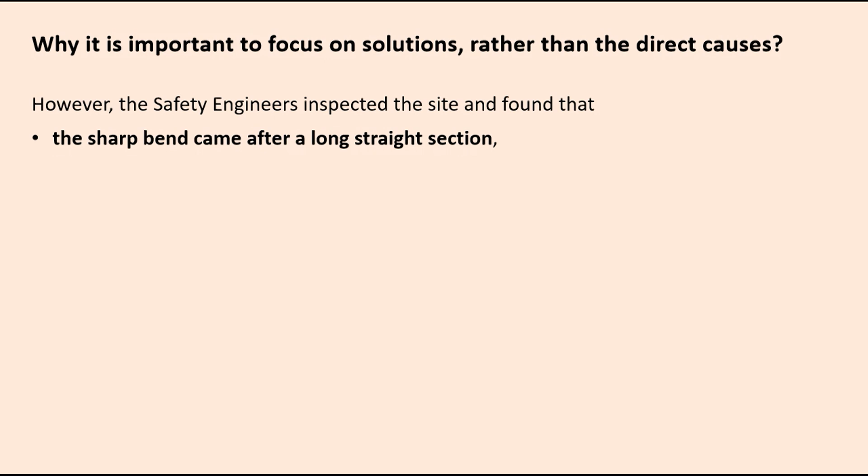Before that you need to introduce some mild curve, so that the speed goes down, and then you can have a sharp curve, or you should have enough warning of that situation. The sharp bend warning sign was not placed, or maybe not replaced once it got damaged. So the first root cause might be this, which encourages the driver to have higher speed when he approaches a particular sharp curve.

At the same time, you had not given the proper warning, and our infrastructure should be such that if the driver makes a mistake, he should be able to adapt to that, or be protected. The roadside safety barrier was missing, which might have prevented this vehicle going down into the valley. If the sign had been in place, the driver might have reduced the speed, or if the barrier had been there properly, the extent of the accident may not have been there.

Now, these are two different analyses of the same event. Whenever such an accident happens, we should start looking into the root cause which might be creating a particular scenario perceived by the driver, and then the driver's actions. If you see only the driver's action and do not go to the cause behind it, you will not get the correct reason.

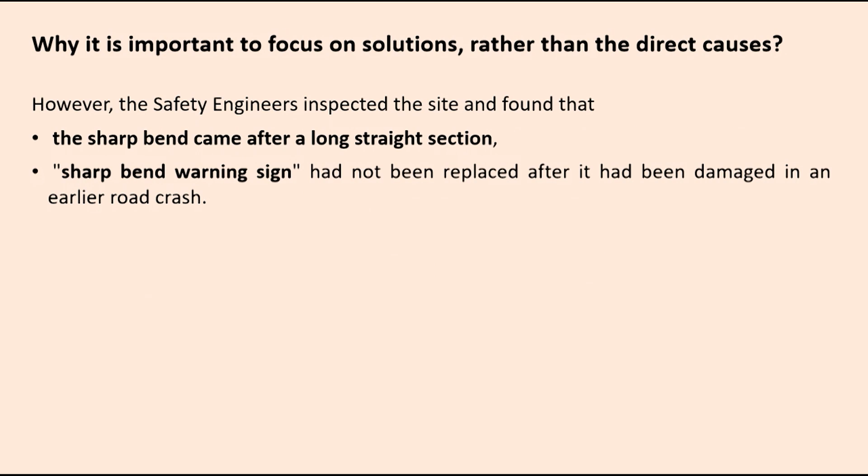So, even with the previous conclusion, if you do driver training and those things at that location, it may not be effective unless you figure out and address all those causes. This is a simple example just to show, for any incident or crash you see, how you are going to investigate it. Okay.

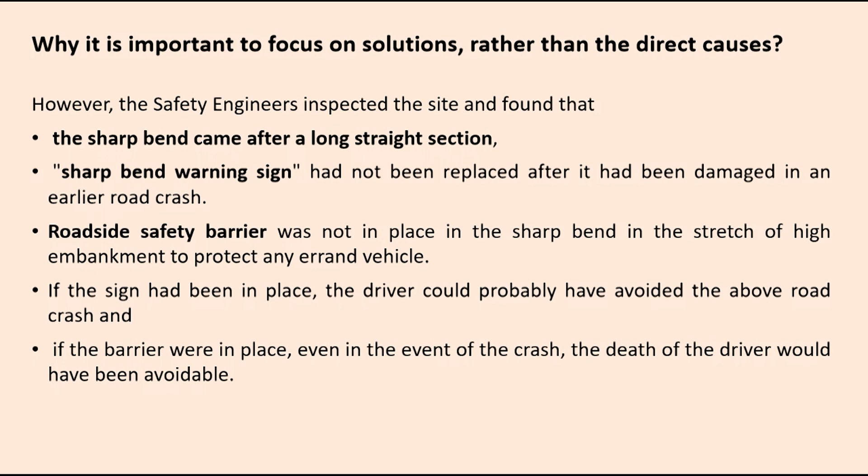Okay. So, then black spot. We keep hearing the term black spot, or sometimes it is called hot spot. Gray spot is slightly different. It refers to a specific location or stretch where a high number of accidents or crashes are expected to happen, which might be fatal or serious injury crashes. Property damage and those things may not come under a hot spot or black spot location.

So, identification of black spot locations is important, so that we can do preventive measures in order to reduce the number of accidents. So why do we need to identify black spots? One is that if you target road safety improvement, you need to know where to do it and where it will be most effective. Black spots are those locations.

Another is efficient use of resources, because you may not have ample funds. With limited funds, you cannot treat all accident locations. So you need some priority: stage 1, you are going to spend maybe only 100 crore. Where to spend 100 crore? 100 crore may not be enough to treat all the accident locations. So you need some priority for efficient use of resources, so that whatever money you invest, you get the maximum accident reduction.

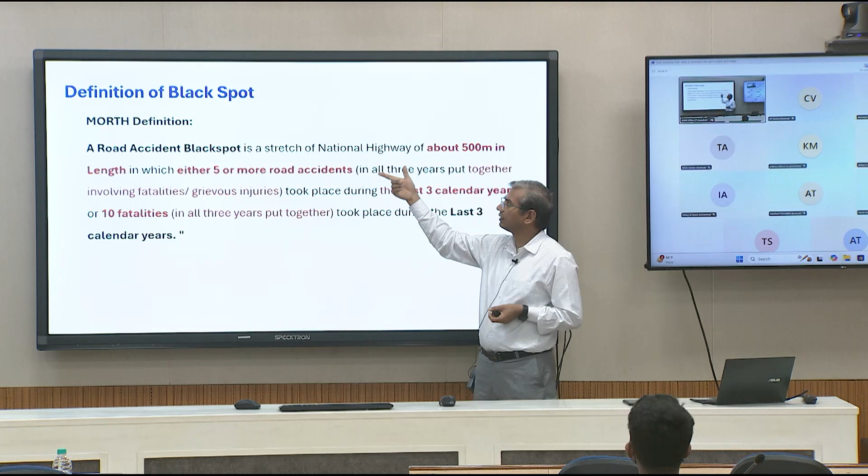Okay. So, now here this number is fixed, the length is important. So, a 500 meter stretch you need to choose. How to choose that 500 meter stretch, that is important. Suppose you are given this kind of scenario where this is a 1 kilometer stretch length, and the engineer started, okay, this is 0. So, he divided 500, then 500. Now, does it qualify as a black spot or not? Yes or no?

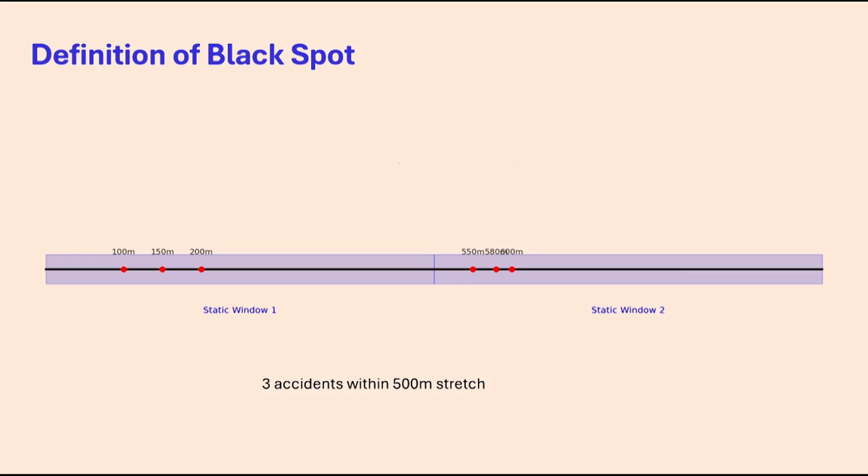Sir, it depends on road condition actually. A black spot happens anywhere, but it depends if potholes are there, if any wrong intersection or junction is there; it's not a particular scale. A black spot can happen anywhere.

Sorry, maybe I did not explain it properly. All these red dots are serious injury accidents, or might be fatal accidents, single fatal accidents. So, you have these 6 dots, and these are the locations of those accidents in meters. So, with that information, whatever the engineer had divided into 500 meters, is that a correct approach?

Yes, sir, that is correct. So, anybody else has 300 or 500? Yeah. So, 500 let us assume, because MORTH has specified 500. It can be plus minus 10 meters or 50 meters, but mostly it is 500. So, any other comment? Now, if we go to the definition, it says 500 meter length. It never said where to start from.

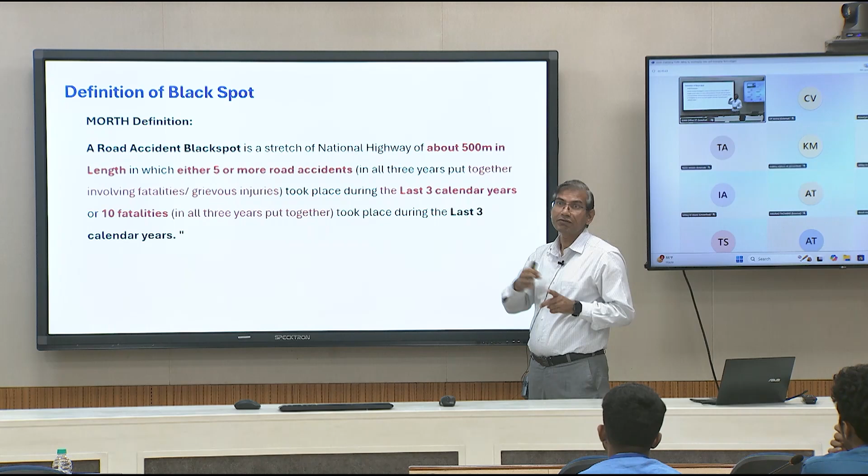So, here, if you start from 0, this is correct. Then you will have 3 serious injury accidents here, 3 serious injury accidents here, both stretches are safe. But it does not say that you start from the beginning. It says you have a 500 meter stretch length, it can be anywhere. So, you have a sliding window, not a static window where you decide 0 to 500, 500 to 1000. You can have 100 to 600, 600 to 1100.

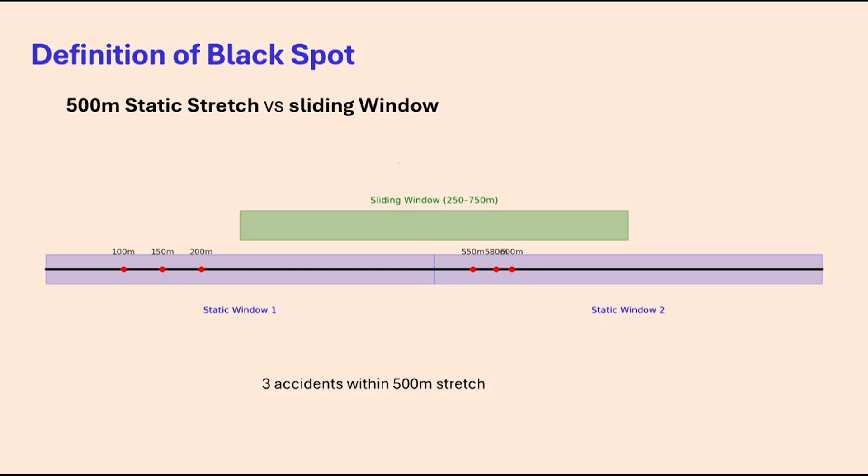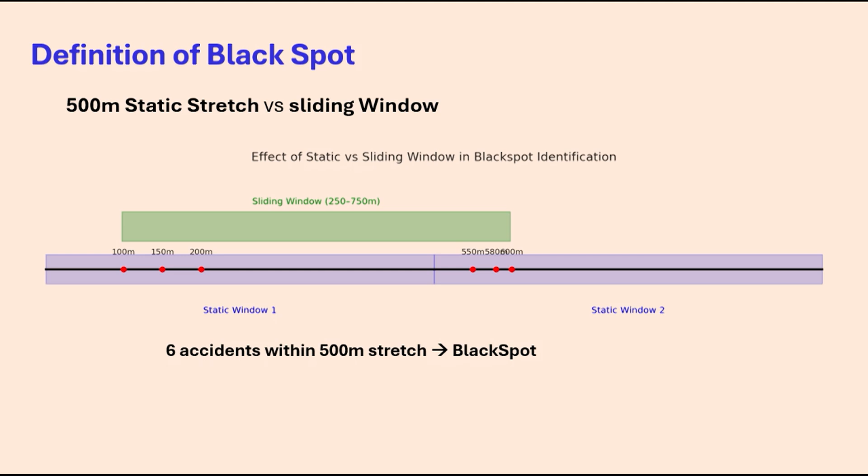Say this is the 500 meter window you have, now you start sliding this window, and it might be 100 to 600. Now, it becomes 6 accidents. Now it becomes a black spot. So, this is important to learn, how to identify the stretch. It is not that from the start you count 500, 500, 500. If you plot the accidents, any 500 meter sliding window that has 6 accidents becomes a black spot. So, you need to understand the sliding window concept instead of a static window concept.

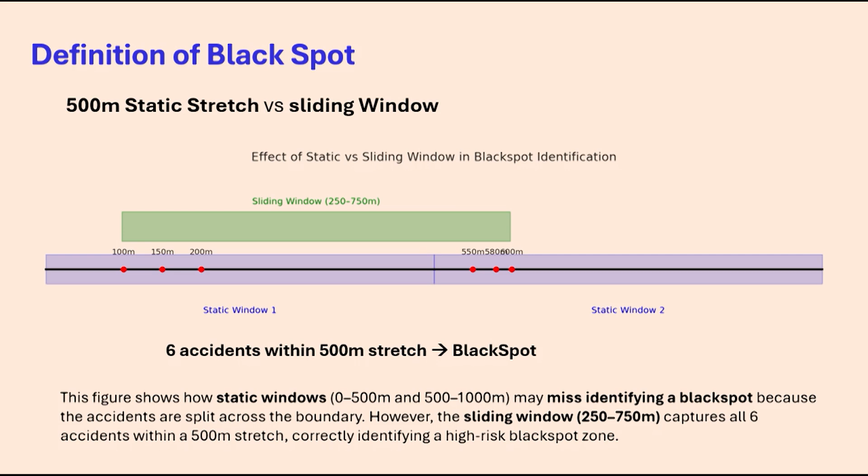Akhilesh? Yeah. So, one quick comment for those of you who use GIS software, the technical term is dynamic segmentation. If you use the dynamic segmentation tool, it will automatically move. Say you want 400 meters, 300 meters, you define the length, and it will incrementally go and find where the criteria are met. Yes, the technical term is dynamic segmentation. Yeah, thank you.

Because in iRAD you can plot those things over a GIS map, you can use all these data analysis tools. So, using the dynamic segmentation concept, you put the 500 meter window and it will automatically keep highlighting where the criteria are met. Okay. So, this was the criteria for the Indian context.

Different countries might have different criteria. We will not go into detail, Professor Sasi has already talked about the US. Many of them do not believe in 500 meters; they use crash potential, or fatal crashes per kilometer in a year, or sometimes crash frequency.

So, in the Indian context, whatever definition there is, let us go ahead with that definition. There are four main tasks to treat a road where bad crash records are there. First, we need to figure out black spots, then treat. So, these are four different strategies for how you are going to treat or make a road safer.

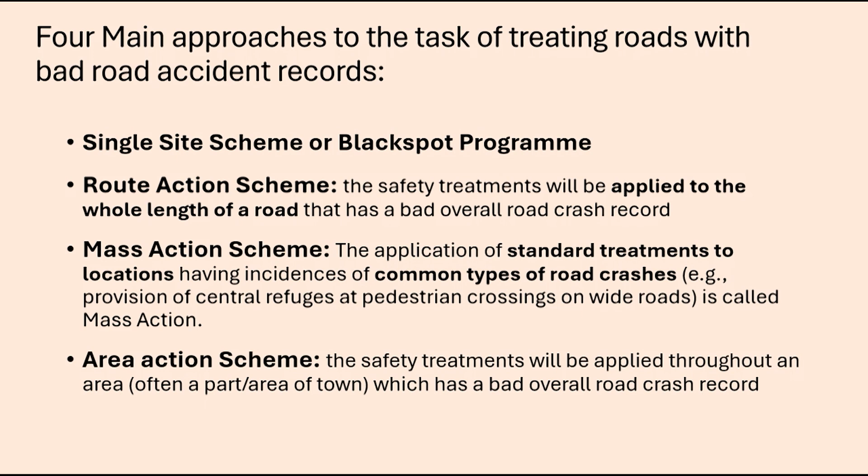So, either go black spot wise, or you identify a particular route and treat the entire route, or you figure out certain common types of crash which might be happening, identify all those crash locations and treat them, or you can identify the area where maximum accidents are happening, and then that area can be treated. Most of the time we go ahead with black spots, because we still do not have enough funds to treat the entire route unless that route becomes very important.

Okay. So, then investigation and rectification of black spots. Why it is necessary: we need to know, based on severity of crash, how to prioritize the list; we will subsequently see how to create a priority list. Then crash data analysis at the individual site and diagnosis of the causes of the crashes, and subsequently we select the remedial measure. Then we provide detailed design and implementation of the proposed treatment, and subsequently we monitor whether the remedial measure has become effective or not.

Professor Sasi has talked about crash reduction factors. For the Indian context we still do not have crash reduction factors. It is not that they cannot be developed; the biggest challenge is that we do not have reliable accident data over time. Nowadays many black spots are identified, and MORTH has made a mandate that you have to treat all those black spots. So, in a phase-wise manner, each state government is taking up removal of black spots, but the monitoring and evaluation part is still not implemented. We need to see what the accident scenario was in the past 3 years before the remedial measure, and what the significant reduction was after it.

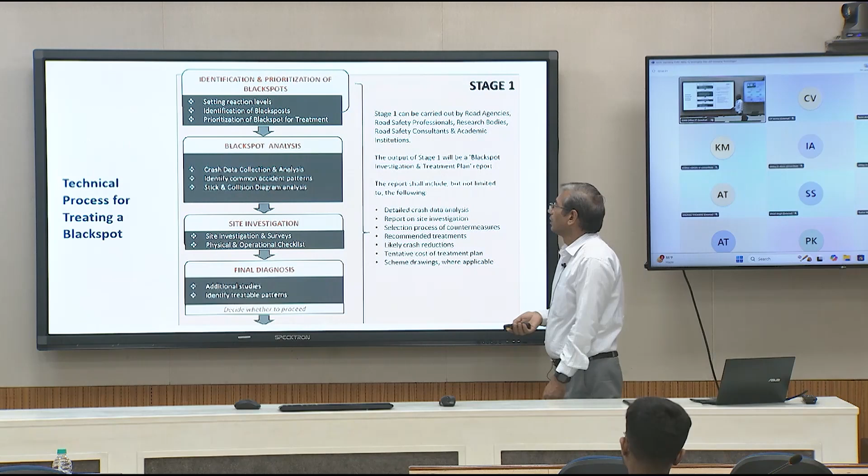Okay. So, these are basically the steps in black spot treatment. You first figure out black spots, then based on prioritization you treat the black spot, collect crash data, do the analysis, and identify the common pattern in those accidents. Based on the common pattern you try to implement some remedial measures.

Once you identify the pattern, you develop the countermeasure, and to implement it you provide the detailed design and drawing, and the cost implication, because unless you have the cost implication ready the project will not get approved. You need to show how much cost is required, and if you implement it, what the expected reduction in fatality is. A reliable prediction of expected reduction is still not there. So, we still get some number and provide the benefit cost ratio, because we do not have crash reduction factors in place.

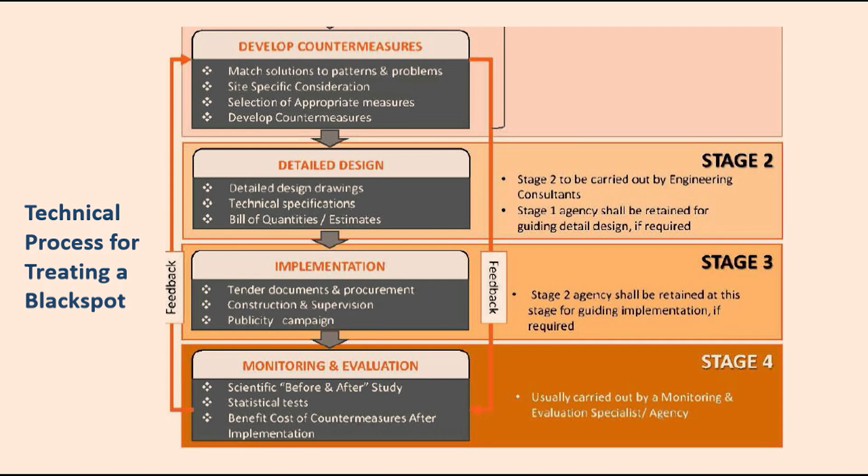Then once that is done, like you have all the drawings and estimates ready, then you tender those things, get them implemented and monitor for the next few years how much reduction happens. So, this is stage 1 to stage 4 of the entire black spot treatment procedure as per IRC code. So, this is that IRC code which talks about guidelines for identifying and treatment of black spots.

So, 2022. Now all these things which we are discussing today, most of the content is taken from there. So, I will share that code itself, because now it is available in the public domain. Okay. So, then in order to determine the priority of that black spot, black spots might also be of different levels. So, to understand what is the grade of a black spot, you need to do certain analysis.

So, one is the average annual total crash, that you need to figure out. So, 3 years fatality data you need to collect, and maybe for all different types of road. So, maybe in your state, if you had expressways, state highways, national highways, separately for expressways, separately for national highway, separately for state highway, you collect the number of fatalities in the last 3 years. Then you also collect the length of that corresponding road. So, how many kilometers of expressway, how many kilometers of national highway.

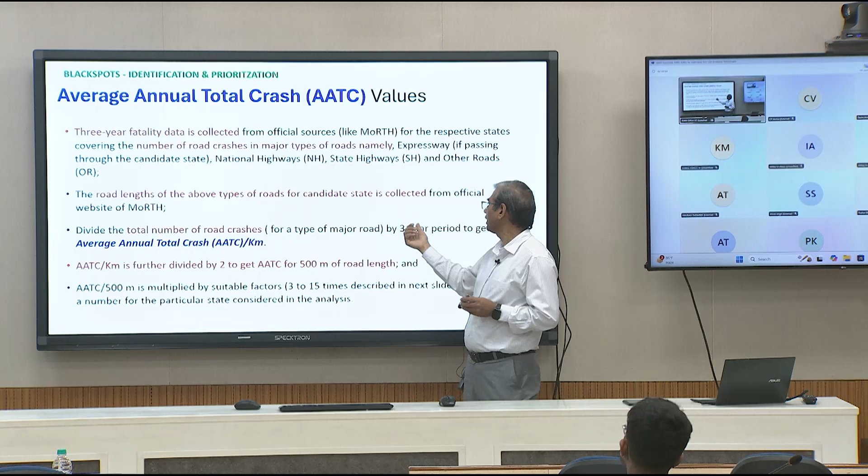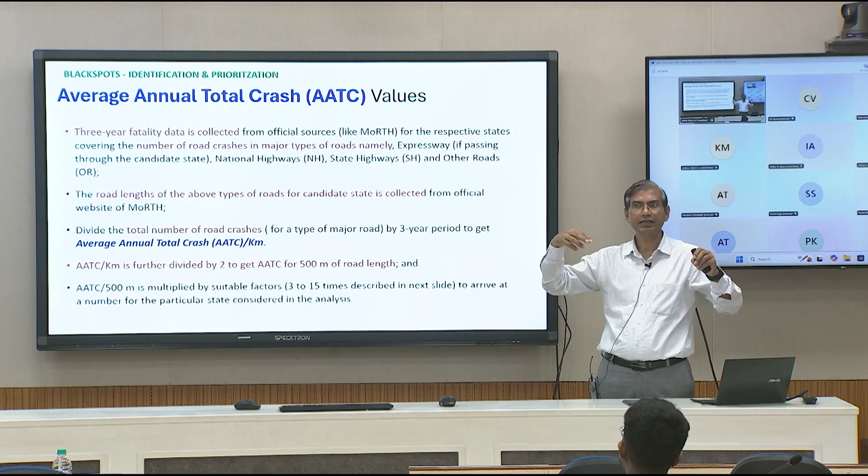So, after that you take whatever is the total crash for a particular type of road, divide by 3 years and divide by the total length. So, suppose you had 50 kilometers of expressway, and in 50 kilometers you had 100 crashes in 3 years. So, 100 divided by 3, this will be per year, and then divide by the length, it will give you the number of crashes per year per kilometer. So, that becomes the average annual total crash per kilometer.

Okay. But here the black spot definition says 500 meter stretch. So, if this is the AATC per kilometer, you divide it further by 2. Then that will be corresponding to 500 meters. So, that value you need to obtain for each type of road. That will give you the average crash rate in your state corresponding to different types of road.

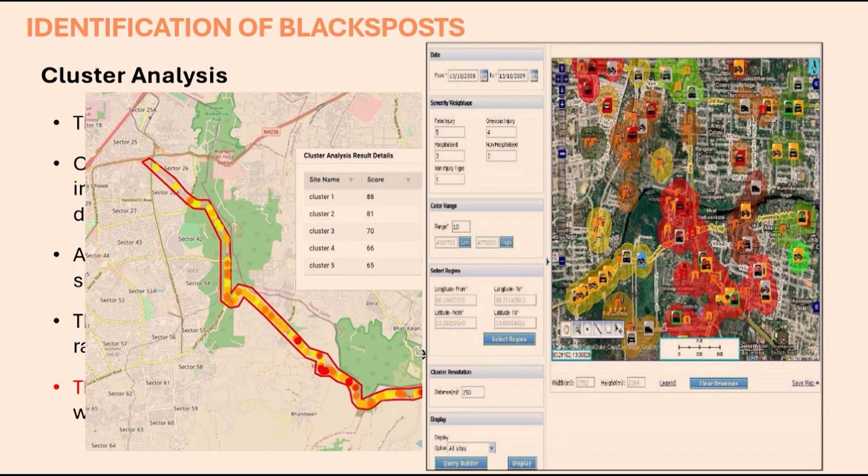So, in cluster analysis, you will try to plot all the accidents and then try to create clusters of different frequency. So, where higher frequency happens, that cluster you can take: okay, here in this neighborhood more accidents are happening, so I will take that location on priority. Similarly, here this cluster is formed in an urban setup. So, darker color will indicate more accidents are happening in that neighborhood. So, maybe that neighborhood you will be treating on priority. So, this is cluster based.

Then you can develop the heat map. So, heat map is also a similar way, but representation is different. So, along the stretch you might have this kind of color coding. So, darker color again indicates that more accidents are happening in that zone. So, if you see that map, you will be able to realize which location is more crucial on that particular stretch. Okay. So, that is another way of figuring out the location. So, here we are not identifying the black spot as per the definition. Here we are doing it based on the cluster analysis. Okay, this zone requires treatment priority.

Okay. Similarly, you can make a grid. So, you can apply maybe a 100 meter by 100 meter grid, maybe 500 meter by 500 meter grid for the entire city or district. Then you see which patch is darker. So, maybe that patch requires more attention. Then you can go and do the in-depth analysis and apply the priority maintenance in that particular grid. Then even corridor analysis, you can identify different corridors and do the analysis and figure out which one is more severe. Okay. So, like here.

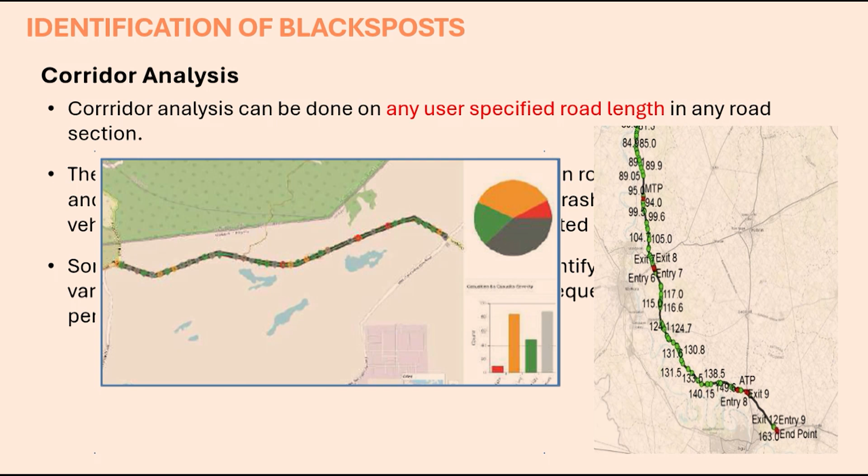So, once you have black spot identification, all the black spots in your area you had identified. So, you need to prioritize which black spot you are going to take up first. So, for prioritization you need to see how many accidents happen in each black spot. Although black spot has a minimum threshold definition, so anything higher than that will be treated as a black spot, but how much higher you do not know. So, that priority you need to set based on the number of accidents.

So, whatever process Sasi has given, that weightage, fatal versus crash. So, IRC says 10 points for fatal, 5 points for serious injury, which is almost 50%, then minor injury 2 points, and then damage only 1 point.

So, it means that maybe one fatal accident might be treated as equal priority with 2 serious accidents or maybe 5 minor injury accidents. So, that tells you how you compare or aggregate different types of accident in order to figure out the overall severity of that particular location.

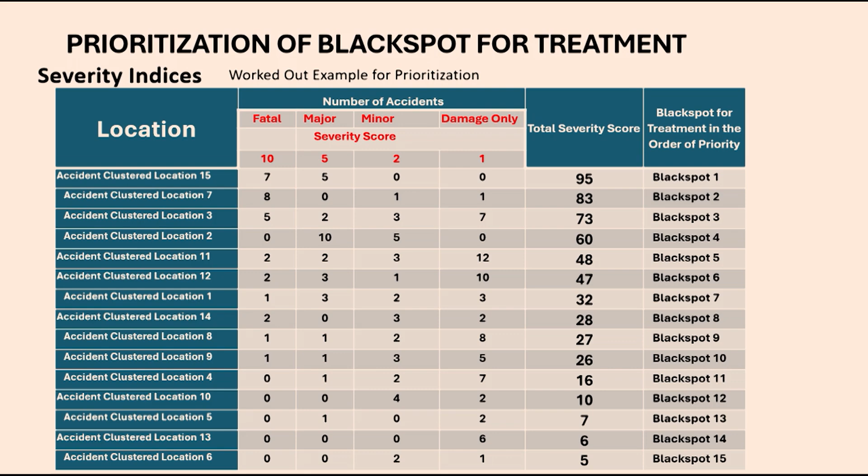For that you require latitude and longitude. So, if you know the black spot or accident location with all the corresponding lat long, you can plot it. So, you can use QGIS or any standard GIS software. There are a few which are freeware also.

Black spot is related to the road environment factor. So are we considering the number of accidents irrespective of the cause behind the accident, or with the cause behind the accidents? Like if there is one accident and 10 fatalities, we are considering it a black spot. Suppose a bus with many passengers got into an accident due to some vehicle related factors. So can we consider this as a black spot?

Yeah. So, as per the current definition, yes, that will be a black spot, but I agree with your concern that this may not be a very appropriate way. But for many field applications, you need a very clear cut guideline. Otherwise, implementing those will be a challenge. If you make it subjective and put too much constraint, then it will become difficult to implement in the field. And that is why they come up with a very fixed number,

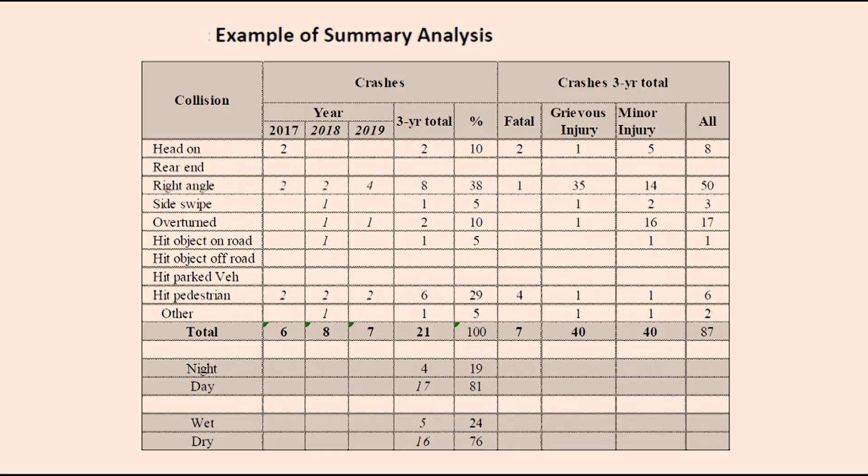So, maybe you plot all the accidents in this format, every accident year wise, or how many were head on, how many were rear end. So, you put them in some table, in order to see what the pattern is. So, maybe if you see that a lot of accidents are only hit pedestrian, hit pedestrian, for that particular location, then you need to see what could be the possible reason. So, here we try to figure out the pattern.

So, not only a table, we can also do this stick diagram, or a collision diagram. So here, if you see, each individual accident is kept under certain factors or conditions. So if we see lots of accidents happening during darkness, it means there is some issue with the street lights, or lighting, or visibility, that we need to figure out.

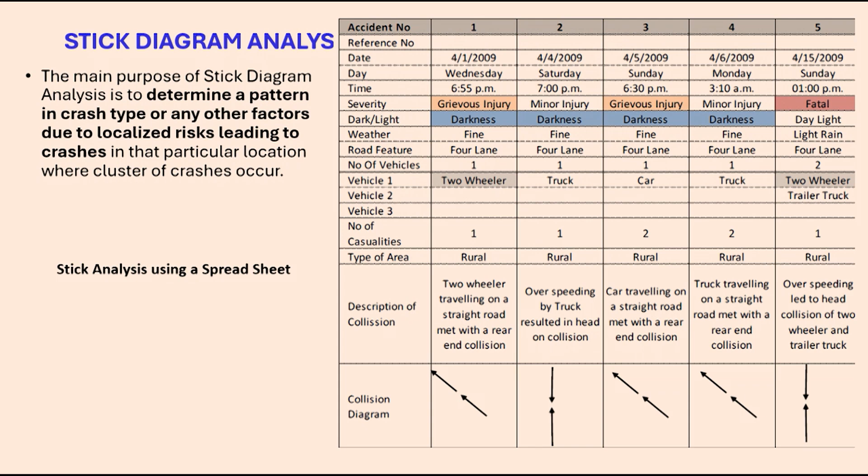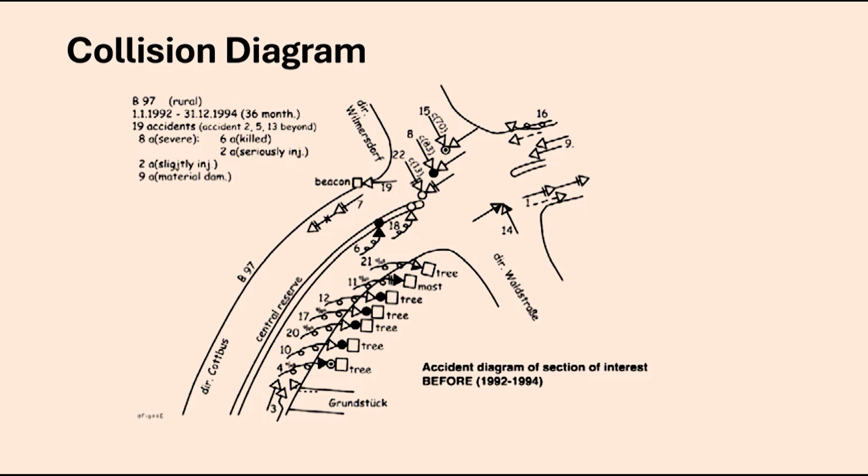So all the accidents we put in a certain format in order to get the pattern. So we even try to draw the collision diagram: how the accident happened, whether it is a rear-end collision or front-end collision, or what is the location. So these we try to plot for each of these black spots and try to see whether there is any pattern or not, in terms of type of accident, location of the accident, timing of the accident, and seriousness of the accident. So all those we try to get some pattern.

And once you are able to do the analysis and get the pattern, the location where a distinct problem is identified, if you are able to identify a pattern that a lot of pedestrian accidents are happening, maybe in the late evening, and maybe at this particular side of the intersection, you can go and investigate and figure out what is the appropriate measure, we will talk about the measures, and implement.

What will happen if you do not get any pattern? If there are 10 accidents, but all 10 were different, spread randomly within the 500 meters, there is no pattern, then that becomes more difficult, because there may not be a single factor dominating the accidents; there might be multiple factors and each accident might be happening because of a different factor. So there it requires more in-depth analysis. You go visit that location and see that maybe you need to treat it for multiple factors; only one countermeasure may not be sufficient for those kinds of cases.

But in the majority of cases you may get some pattern, maybe 2-3 patterns together. One might be related to pedestrians, one might be related to vehicular traffic, one might be related to something else. So if you are able to identify 2-3 patterns, corresponding to those patterns they have already listed some countermeasures, and then you need to see which countermeasure will fit well for that kind of situation, and you can go ahead and do that.

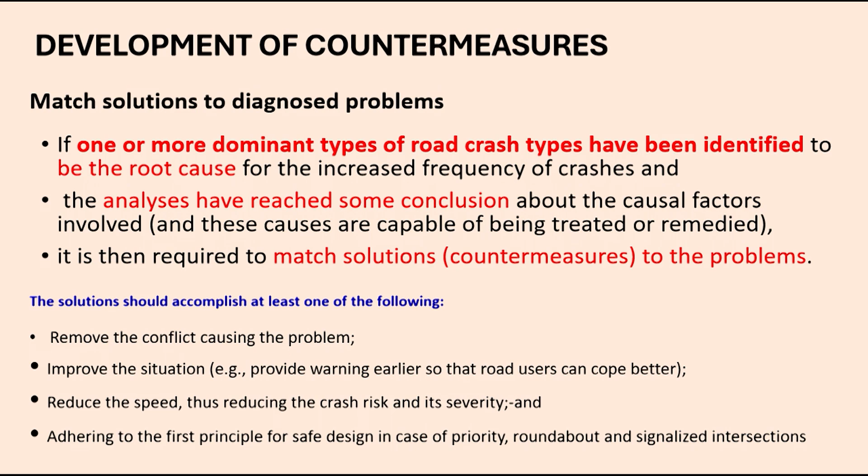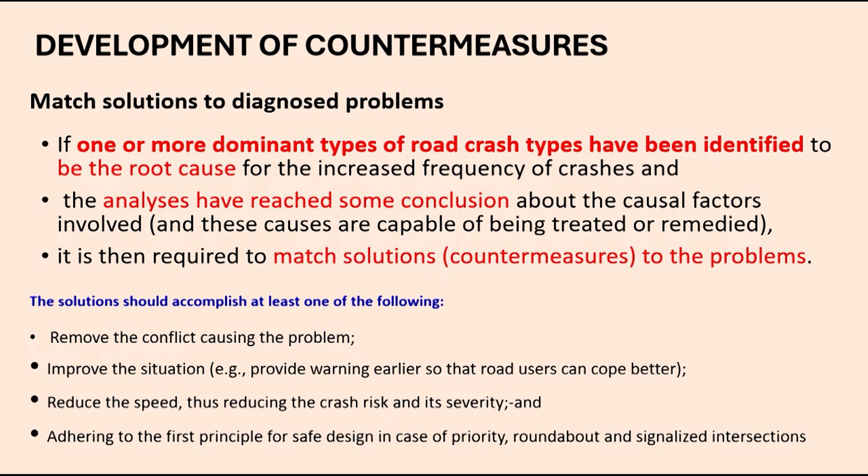So put a warning sign that there is a 4-leg intersection, there might be conflict, and then traffic calming can be another measure. So you have warned the driver; apart from that you want to minimize the risk level. So you reduce the speed, which Professor Sasi has also highlighted. If you reduce the speed, the accident severity level is going to be substantially lower. Then go with the safe design principle and see whether the particular location complies with those safe design principles or not. So these are 4-5 points which you need to keep in mind while deciding any kind of countermeasure. Okay.

Then you need to see that any specific measures you are going to suggest, we need to evaluate on these points. So, for the countermeasure, the first thing is whether whatever remedy we are going to provide is cost effective or not, because resource constraint in India is still a big constraint.

So, you had a sharp curve, so the permanent remedy is to make it a mild curve. That will resolve the problem in most cases, but you may not have land available, so you cannot do that, or even if land is available, you cannot invest that much money, or this process itself will take 2 years. So, are you going to wait for 2 years with nothing additional?

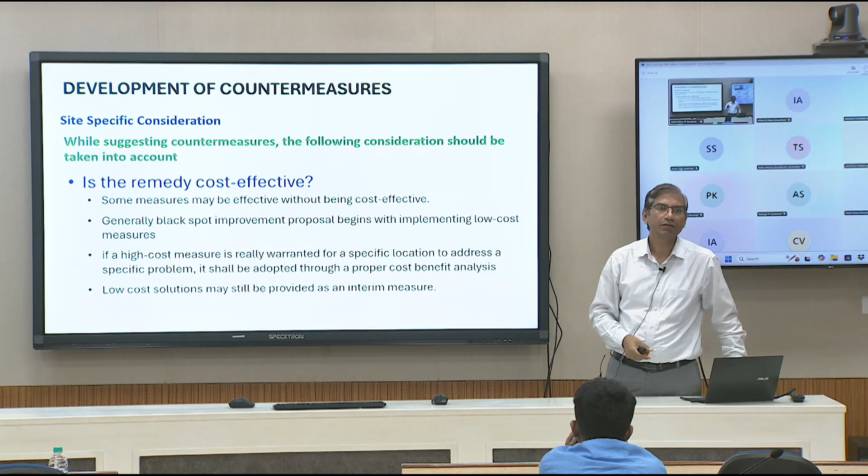So, whatever measures you are going to adopt or suggest should be cost effective. You start with the economical one; you can have different layers. If you had a sharp bend, start with traffic calming measures first, which can be implemented very quickly with a low amount of investment. Subsequently, you can suggest that within 6 months or 1 year, this sharp curve should be changed to a mild curve.

Then, whether that particular measure adheres to the first safety principle of that particular geometry or not. Whatever measure you suggest should comply with the first safety principle of that geometry. Then, whether the measure will be long lasting or not. If it is not, it needs to be clearly stated that at a regular interval you need to keep applying it. For traffic calming, you put rumble strip marking there, but rumble strip marking will go away within 6 months or 1 year. So you need to clearly write that inspection should be made every 6 months to ensure the effectiveness of the rumble strip is maintained. That kind of instruction should go in your recommendation.

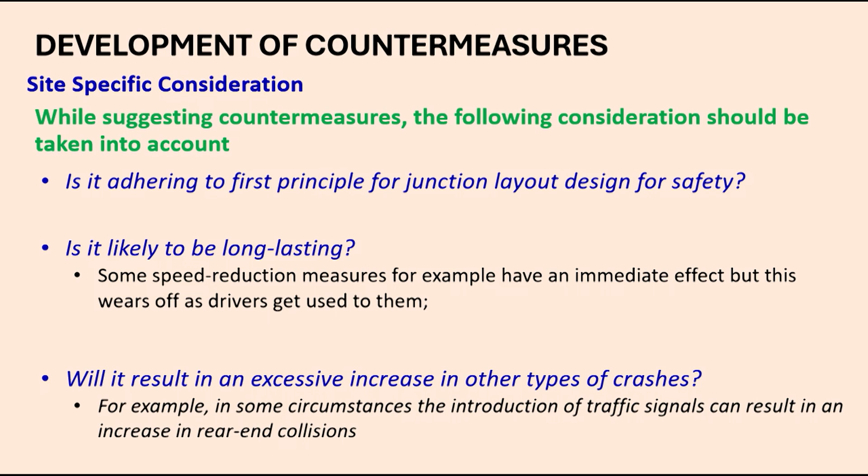Then, will it result in an excessive increase of other types of crashes? Maybe you resolved one, but you might have created something else. In one case, there was a flyover going down and merging with the flat ground, and just after the flyover touched the ground, there was a divider opening. In the majority of cases, pedestrians tried to cross, and because of the gradient, vehicles came at the fastest speed and hit pedestrians.

Here, one cost-effective solution could be to put rumble strips. The rumble strip will slow down the speed, so accidents might reduce at this location. But vehicles might be coming at very fast speed, suddenly see the rumble strip, and slow down. The vehicle behind may not realize. So over time this problem got resolved, but rear end collisions started happening in that location. So you need to be very careful that whatever you implement should not cause some other kind of problem. You should have that anticipation or experience, so that while suggesting something, you don't solve one and create some other problem. Okay.

Hey Akhilesh, if I could interrupt. Yeah, please. I know Ritvik asked a similar question. I assure the participants that Professor Maurya and I did not discuss this example ahead of time. It just so happened that he picked a similar example. Ritvik asked exactly the same thing. Okay, I was not aware. When we talked about countermeasures, you may do one or two things that improve safety, but inadvertently something else might go the other way. You improve some things, and then rear end collisions happen. Yes, that happens. At a few real locations I had experience with, this happened, so that's why I remember those examples very well.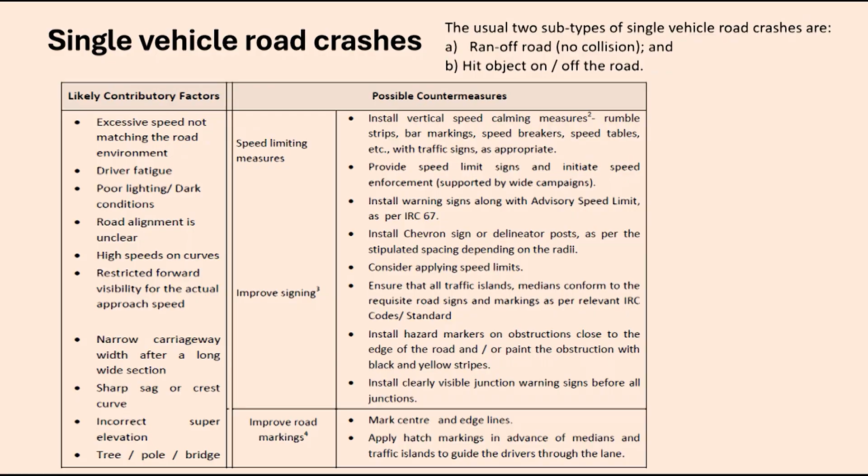Consider applying a speed limit in that particular zone, ensure all traffic islands, medians and road signs at that particular location. Install hazard markers on obstructions which are close to the edge. Install clearly visible junction warning signs. So, these are the measures which might ensure controlling the speed, reducing the speed, or warning drivers to reduce the speed, as well as improving signage that will give you the message related to impeding geometry.

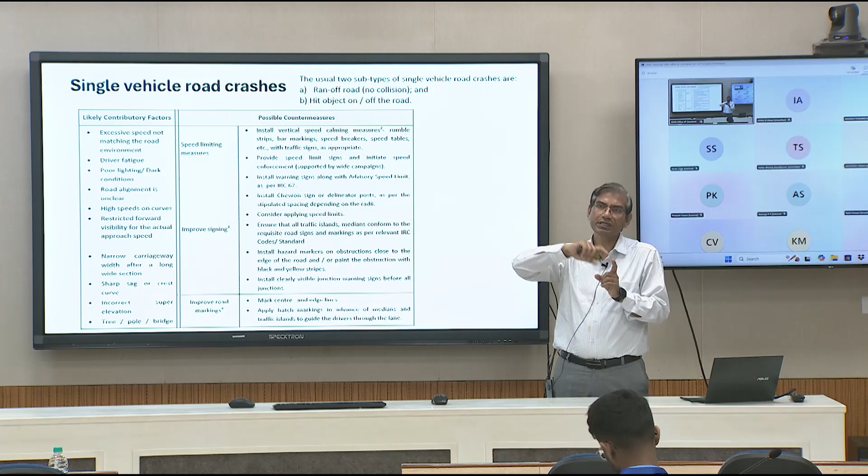Then there is another set of measures which might improve the road marking, that will also help in single vehicle crashes. If road marking is proper, you may be able to see which way the road is turning. There might be measures related to improving visibility, measures related to the roadside environment, improving the road geometry. So, a long list of measures is already suggested in this.

So, your effort is that first you identify the pattern on a particular road geometry. Once the pattern is identified, try to figure out the root cause. Among all this list, see what could be the cause which might lead to this result. There might be multiple root causes for a single accident. Figure out as many as possible and tick those. Corresponding to that, among these categories, you figure out which category might be applicable.

Say, in a sharp curve case, you might need traffic calming measures as well as signage, even lane marking might be required. So, multiple measures might be required, you tick those. Among each category you might have multiple measures, then you choose which might be suitable to that particular location. Even though 5-6 measures are given for achieving a particular objective, all may not be effective at a particular location. So, you need to choose based on your geometry which particular measure will be effective.

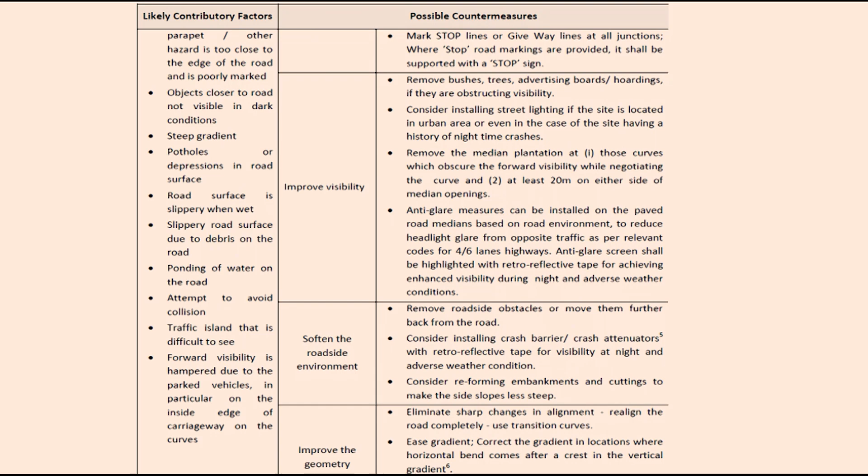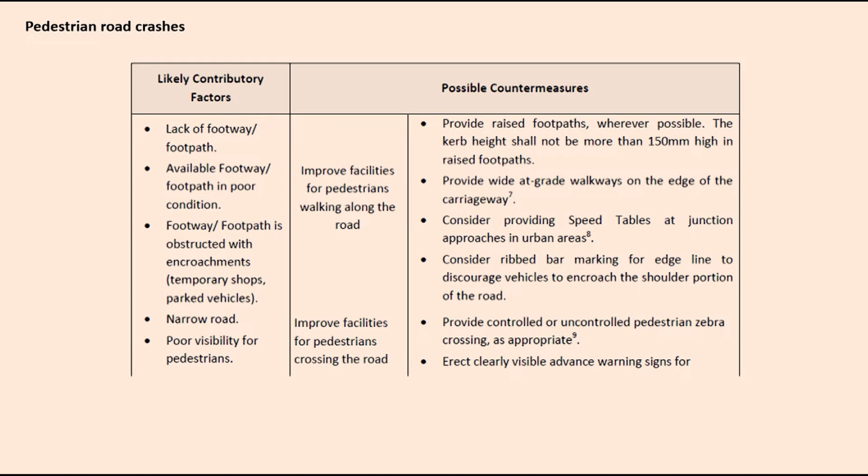So, you cannot have a very straightforward rule that you put your condition and you get the measure. It will never happen. It requires reasonable understanding and experience to identify the root cause, and then how the root cause can be resolved using these measures. So, this is one type of accident. Then for pedestrian related accidents, there is a list of contributing factors and a list of possible countermeasures. All these things are given in the IRC code.

We will not go in detail, because this is a long list, and unless we correlate the factor and countermeasure, you will not be able to understand anything. That correlation will depend upon the specific case: what is the exact geometry, what is the type of accident, what could be the root cause, what could be the countermeasure. That has to be studied case by case for a particular black spot, what accidents happen and what measures we adopted. Okay. Now, this is all.